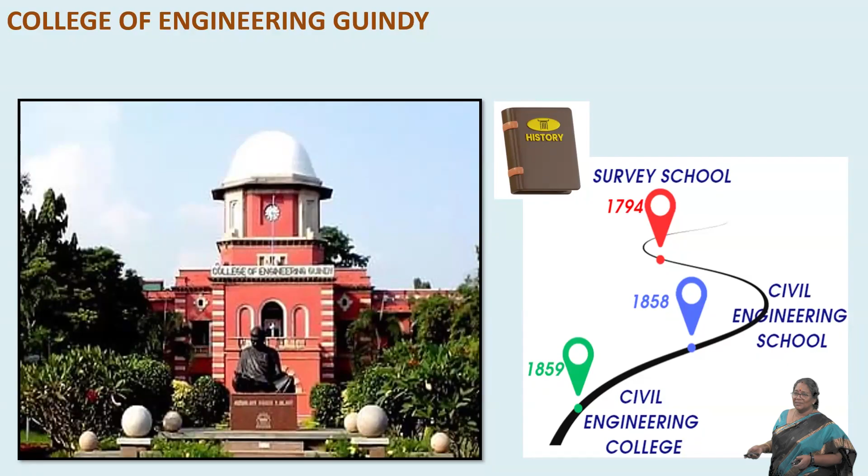Prior to 1858, it was a survey school. Then later, in 1858, they named it civil engineering school. In 1859, they named it civil engineering college, so we got the crown as a college in 1859. From 1861 onwards, mechanical and electrical started, and they named it College of Engineering, Guindy. This is the first in South India. I could say this may be the first technical school, not college, outside Europe. So that's the legacy we are holding even now.

With respect to Department of Civil Engineering, we are running 3 UG programs. It is very special that we run a PG program in a regional language, Tamil medium. And BE Geoinformatics is a very special course, focusing mainly on surveying. Nowhere else do we have BE Geoinformatics. We also run many PG programs, a total of 10, and PhD and MS by research in all disciplines. I cannot start any lecture without saying this, because I belong to Department of Civil Engineering, College of Engineering, Guindy, Anna University.

Our QS ranking was 385 last year. This year we have slipped down to 469. Sorry to us. Okay, so now I start the lecture.

It is on Precast. I think you'd have been listening to the introduction part in the previous session, which started 2 days back. Yes or no? So my class generally will be two-way traffic, never one-way traffic. I am not the radio. Kindly respond, then only the classes will be lively.

So you know what is meant by precast construction: practicing casting of components in the factory and bringing them to the site to assemble. Earlier we know this happened with respect to steel structures. Kirby is a very eminent factor, but I mean people who manufacture steel sub-assemblage and do the erection at the site. In the same portfolio, people started working in precast concrete structures also.

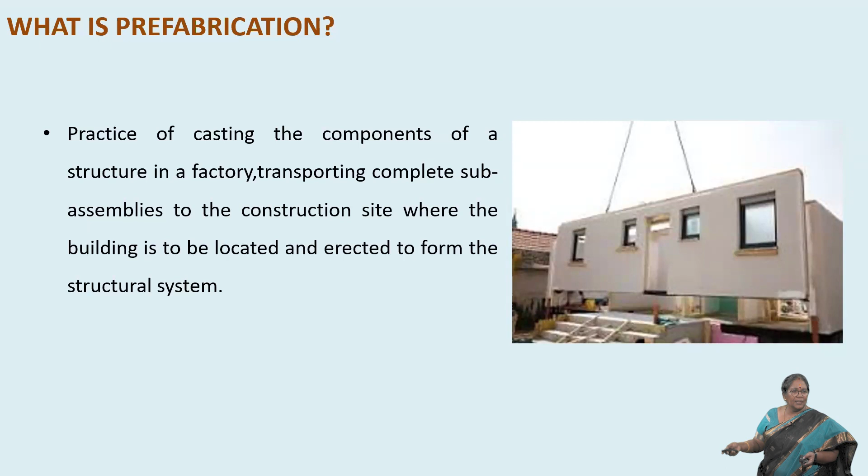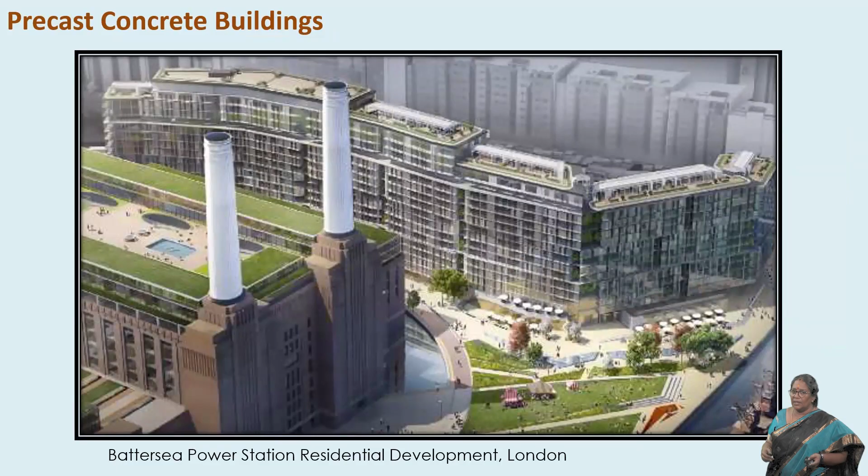Okay, so these are a few pictures. This is from London. London is not too far for precast construction. I even visited Leeds University and gave a lecture on precast construction. The hall was totally full, because they wanted to know how it is executing the precast construction. They are not known for precast construction.

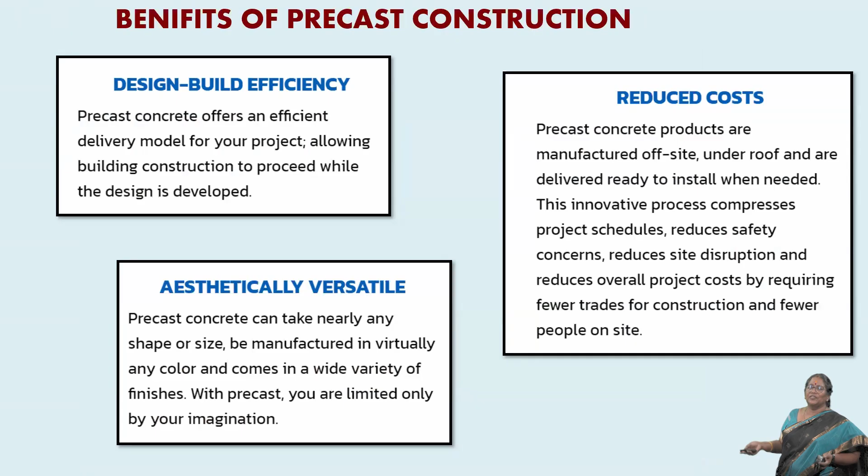There are a lot of benefits for precast construction: thermal efficient, low maintenance, sound control, Wi-Fi compatible - that is a new thing. People have a projected life for precast construction.

I don't think it is nothing new, but want one more benefit: precast is completely recyclable. We can dismantle and reinstall if it is possible. The connection has to be designed accordingly, making it an environmental friendly choice. That is the most wanted benefit people are saying.

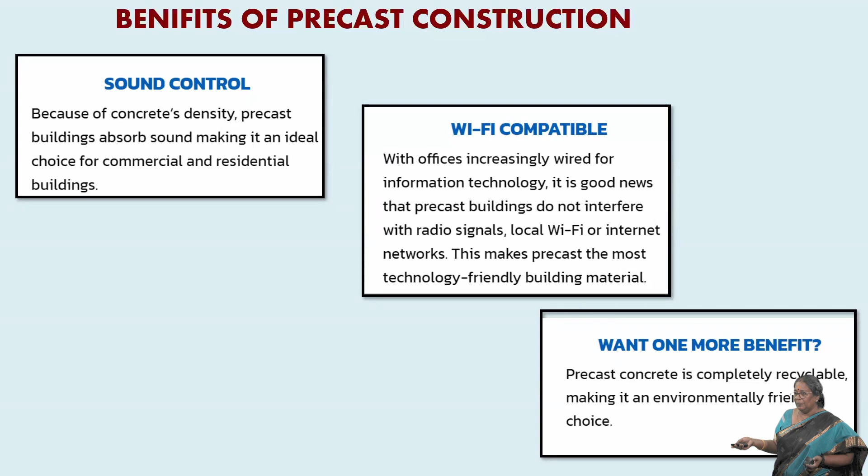Considering all these benefits, some deficiency will be there with any system, isn't it? So what is the performance of the precast structures under seismic loading? It's a very big question mark.

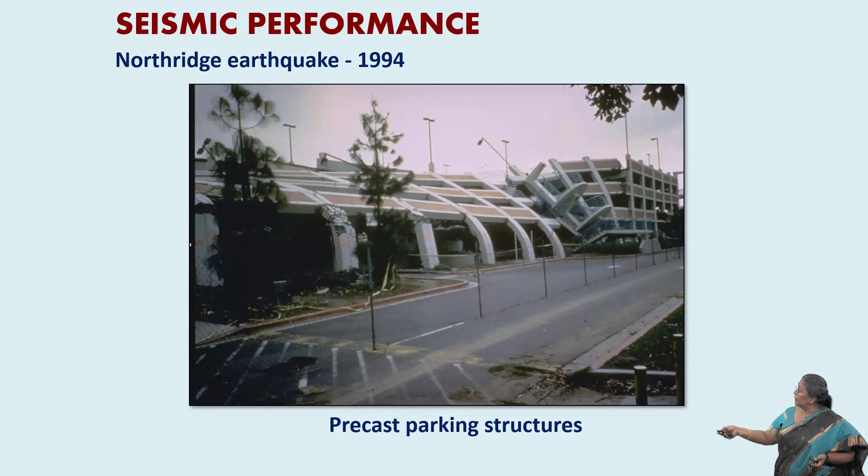This is the after-effect of the Northridge earthquake which happened in 1994. This is the failure pattern of the parking structures. Here also you can see the structure has collapsed due to the lack of connections. You can see here the lack of connections initiated the collapse of the structure.

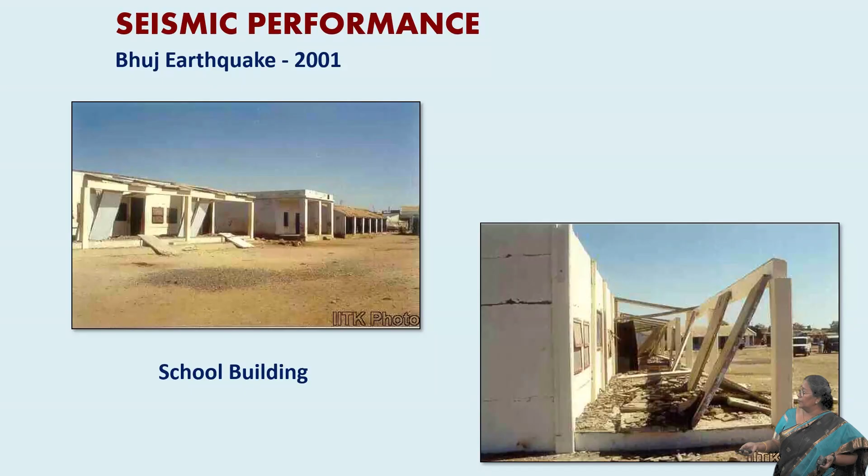This shows the importance of doing research or investigation on the connections, various types of connections. So structural elements were intact, but joints and connections failed due to inadequate detailing. This particular aspect attracts more researchers to work on the connections.

So what is the major issue? Poor connections. And you can see some leakages also in those joints. That was a major concern.

During 2016, the Structural Engineering Convention was conducted by SERC, the director Santosh Kapuria, as well as Professor Mahaprasad. Santosh Kapuria was chairman and Professor Mahaprasad and I were the co-chairpersons for conducting SEC. As part of collecting money for conducting the SEC program, we visited L&T, we met SNS.

He asked me what my research topic was, and I told him I am working on precast construction. I had come out with a lot of connection detailing and was explaining those things. Then he told me only one thing: if I can come out with a material which fills the joints and is leak proof, that would be the best option for them.

So now one of my research scholars, who is working as a faculty in College of Engineering, Trivandrum, is working on the topic of high performance concrete, micro concrete, replacing the grout of the connection joint. He is working on it, and I don't know what will be the compatibility of the normal concrete and the joint concrete.

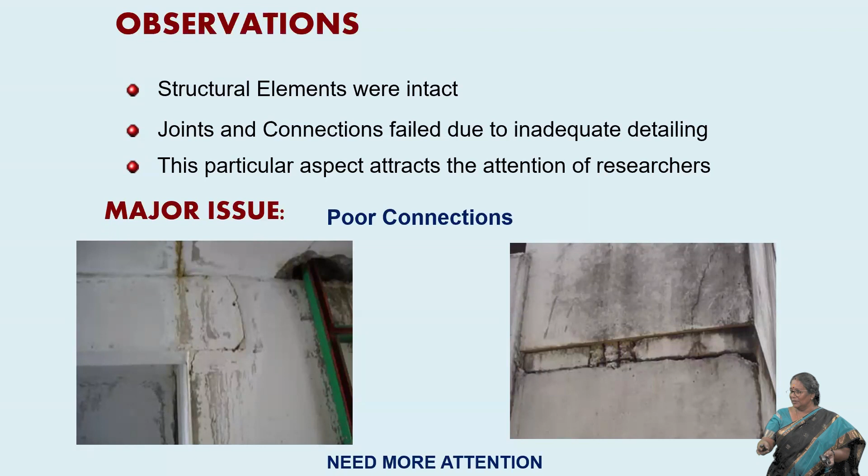Also we are working on durability aspects. I have about 2 more years before I retire from College of Engineering, so before that I could do something on that part, well and good. Around 7 people have completed their research on connections, and this person is working on that now.

Now, joints and connections are sometimes erroneously given the same nomenclature. First, kindly understand the difference between a joint and a connection. You can see here, this picture I have taken from Elliott's book.

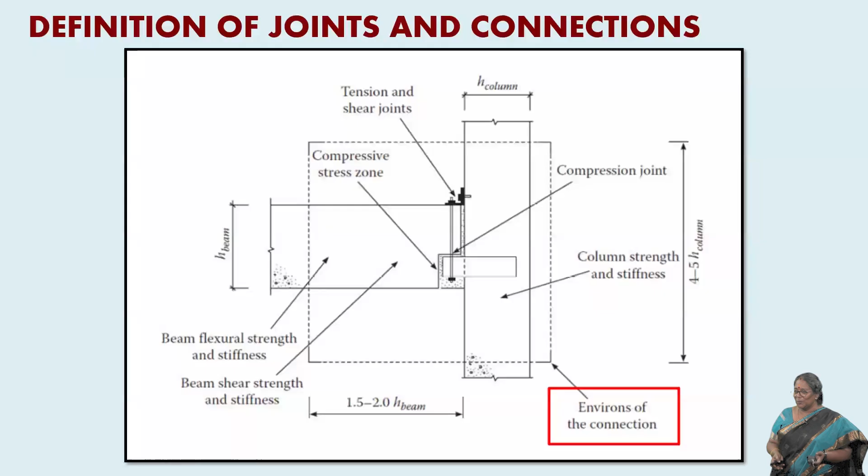Most people would have given you pictures and figures from the Elliott book. You can see here multiple joints: tension and shear joints. You can see the tension and shear joints in this part. Here it is a compression joint where this dowel member is there, and all these different types of joints - tension joint, compression joint, and multiple compression joints in a compressive stress zone.

Connecting all these different types of joints together is what is called the environs of the connection. Different types of joints will be there - tension joint, compression joint, shear joint, multiple different types. The totality of all these joints together is what is called the connection. So in a connection, different types of behaviors will be there - compression, tension, and shear.

Now you can see, especially for this column to beam connection, the connection region has been named with a dimension of 4 to 5 times h of the column, where h of the column is this one. And the width, from the face of the column, is 1.5 to 2 times h of the beam. Taking the count from this face of the column, this total region is what is called the connection region. So this is the basic fundamental difference between joint and connection.

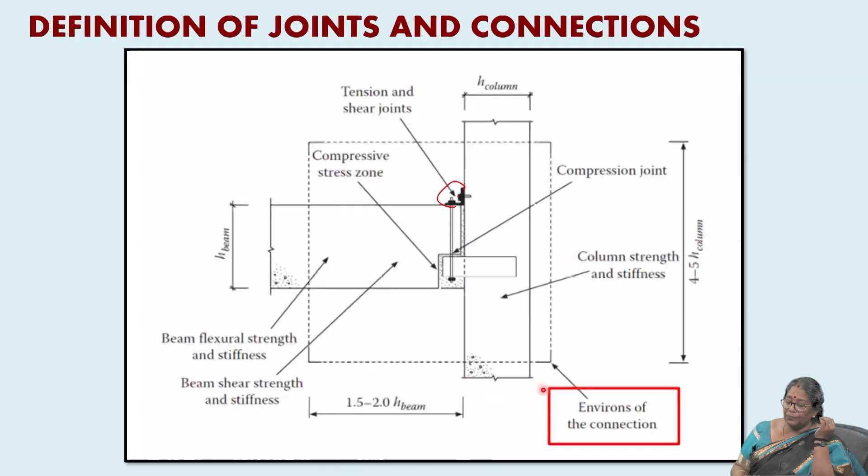Now I will explain the different types of joints. When we do the analysis, it's not a simple thing. When we talk about precast elements, we can design them in our drawings and calculations, columns also we are designing, and nowadays UG students are doing only this - they are doing the design of elements. When it comes to the joint, my humble request is that even once you become faculty members, kindly teach them how to connect the elements, and teach the joint region as well.

When students go out of campus and somebody interviews them asking about the connection and detailing at the joint, they are totally blank. When I teach RC design, I teach it fully, but I'm asking everyone to teach the complete totality of the design of RC structures. I humbly request all faculty members, and students who will become faculty, to teach the totality - otherwise it's a waste of time for them as well as for us.

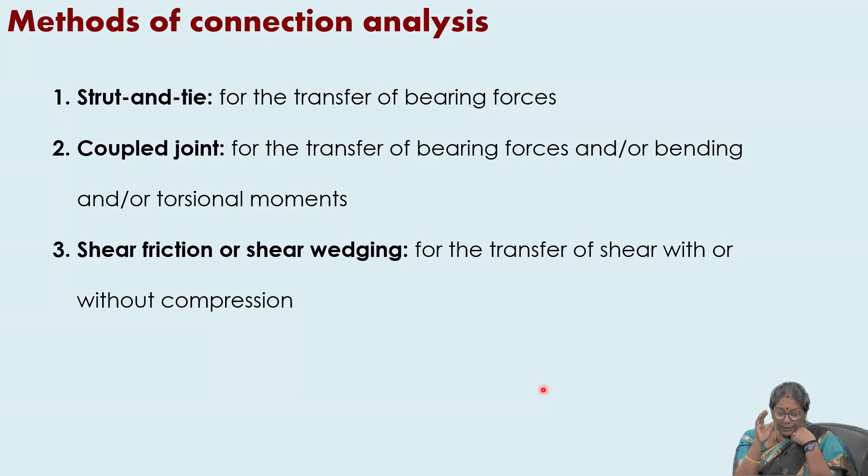So when we do the analysis of the joint or connections, we can utilize different methodologies: the strut and tie method, couple joint method, and shear friction or shear wedging method. I'm not going in depth with this because it's a very lengthy process, but these are the various methods we can utilize for the analysis.

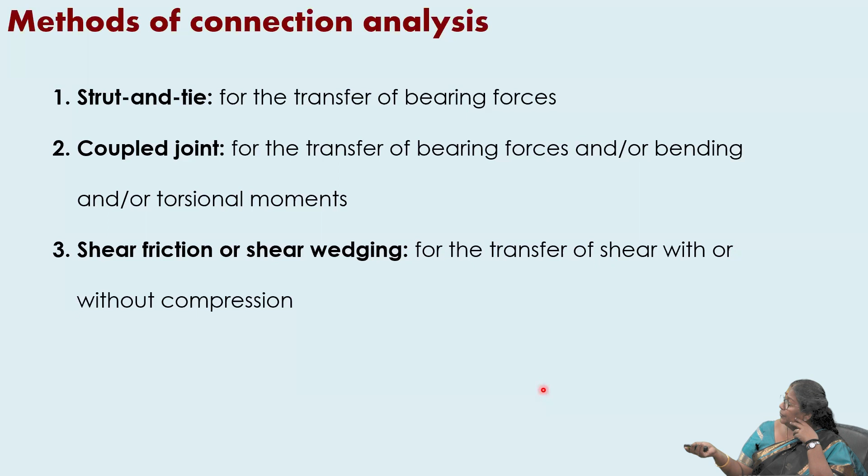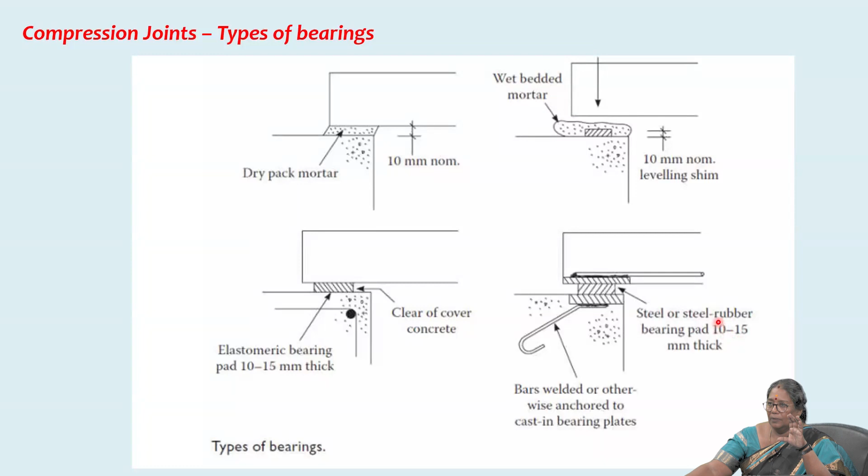And here also you can see, this is the compression pad, wet bedded mortar, which has been used on top of the bearing pad. This is a steel or steel rubber bearing pad, 10 to 15 mm thick. All these are different types of compression pads, bearing pads, which bear the compression stresses in that joint region. These are the various types of compression bearing pads and compression joints.

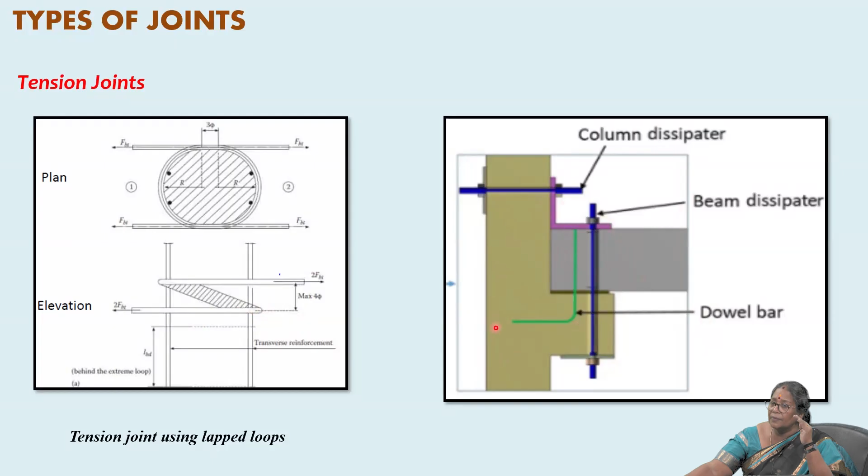And here also you can witness these dowel bars, when this beam is getting loaded and this particular area is getting stressed with the joint shear and all, these dowel bars will undergo tensile pressure. So we are supposed to design even each and every minute aspect of the joint region also.

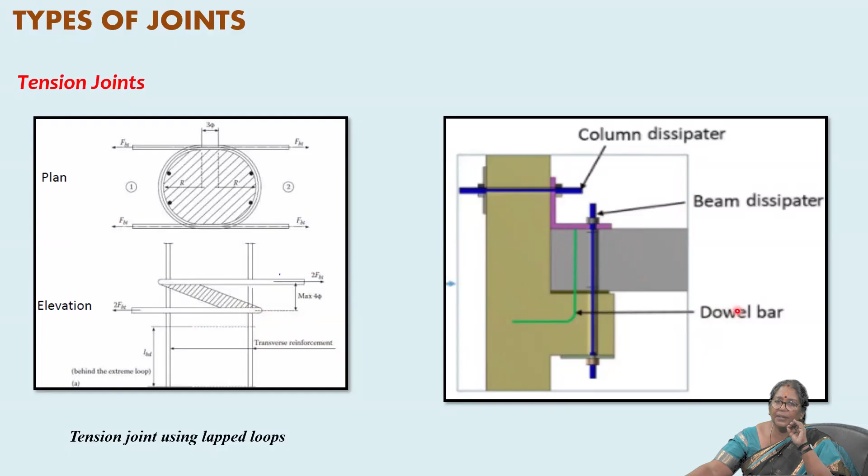So now comes the shear joints. I have taken some more examples. The shear joints, whenever you look at the dowels, it will be undergoing the shear action also. Double shear, you would have studied in soil mechanics, double shear test, isn't it? Similarly, all these dowels, when connecting through one particular element and passing through the other one, will undergo shear stresses also. So this comes under shear joints.

Now comes the major part. We generally go with, most RC precast elements are designed with the moment resistant joint. Now just look at this beam column joint, that also is moment resistant. We are not releasing it. Some elements, some structures we can design as a pin jointed connection. I'll show you, after my presentation, the difference between the pin and moment resistance connection. This is the moment resistant connection.

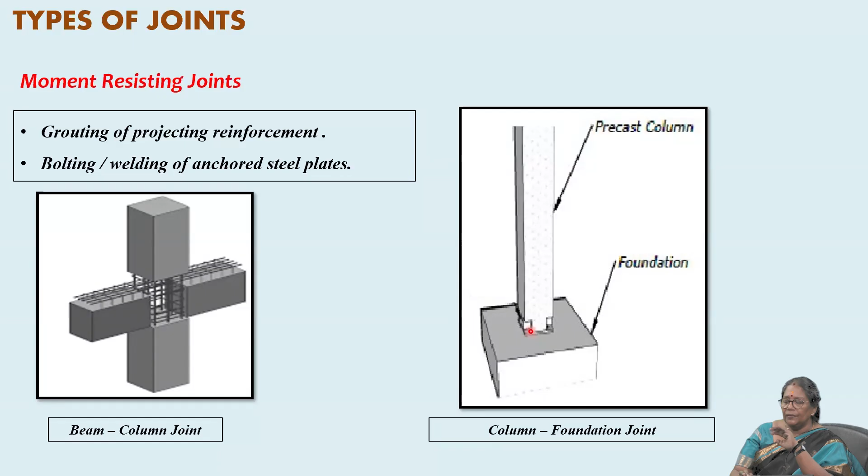We are allowing the joint to take moments, not only here in the beam column joint, but also for the foundation, the column foundation joint, which we can also design as a moment resistant frame. We have to design these elements and the joints accordingly. That's the important thing.

Now I'm going to discuss, till now I was telling about the joints, now comes the connections. So the connections, basically 4 rules we have to satisfy with respect to joint and connection. Satisfactory joint design, which is further taken to the connection region, and the component can resist ultimate design loads in a ductile manner. We have to make sure all structural elements connecting in that joint, as well as in totality as connections, each and every element has to be designed as a ductile element. The precast members can be manufactured economically and be erected safely and speedily.

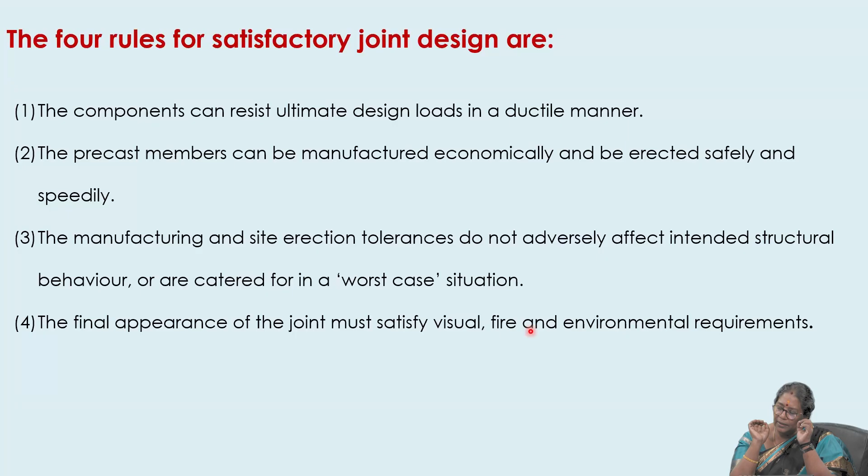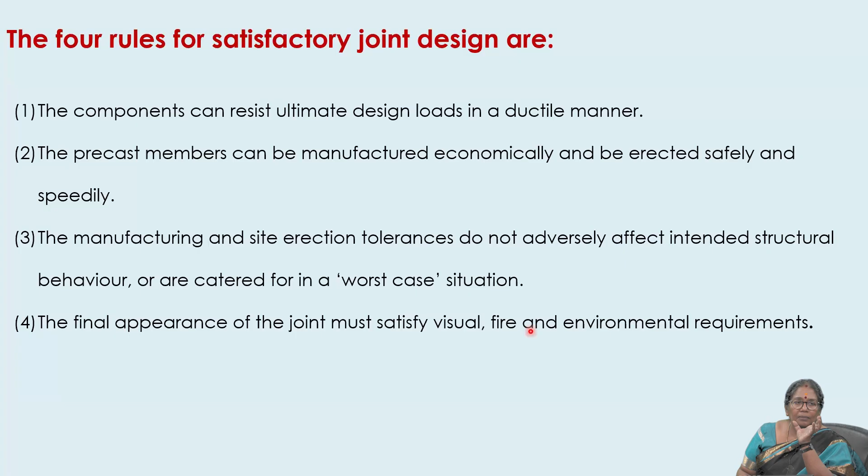These are very, very important. The last one is extremely important, but why? Because whenever we are thinking about the safe joint, architecturally we cannot make it pleasing. There also, there should be a balance between structural safety, strength, and visual appearance. All these things should be matched together whenever we are designing any structural system.

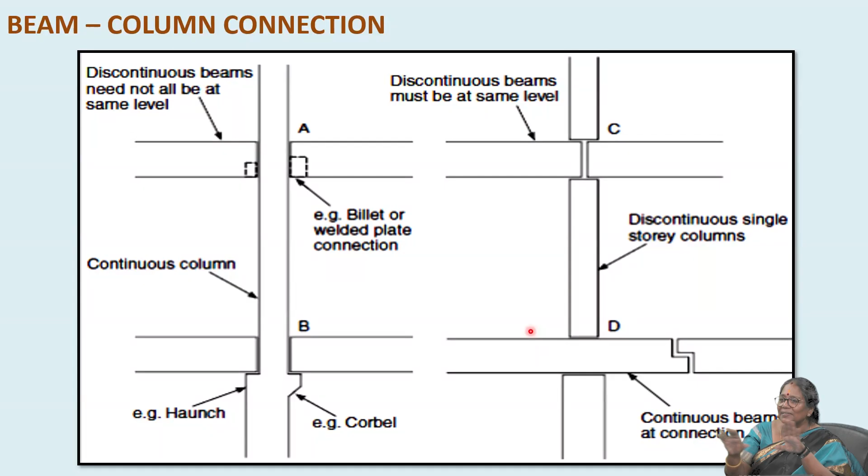Otherwise, any junction, like a traffic junction, is also dangerous, isn't it? Here also C is a dangerous thing. But most construction in practice follows C. That is the unfortunate thing. We are following condition C, where both are discontinuous, which only gives flexibility at the site.

It is not a dry connection. Generally it is an emulative connection, a hybrid connection. There will be mechanical elements as well as dry plus wet elements - that I can call an emulative connection. Generally, people are following connection C.

Because of that, we have to give more importance while designing the connections. Continuous reinforcement will be provided as a dowel bar - from one column to another column as well as one beam to the other beam. Proper connection has to be there. That is the challenge: how we will provide proper connectivity between the beams as well as the columns.

It's essentially a junction. When you think about a traffic junction, the challenge the traffic police face, we have to take that same challenge and do the design appropriately, without harming the best feature of the joint - the elements being factory made, perfect elements - and how good we can make the joints matters a lot.

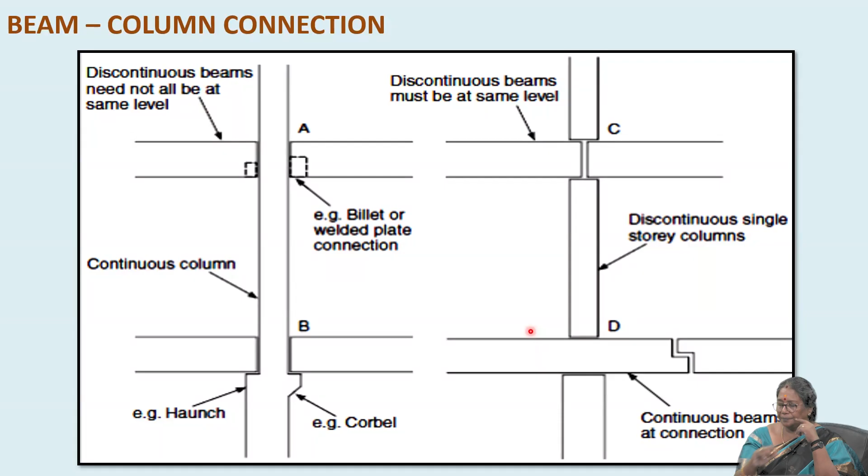Now you see here, in this case, columns are continuous at that particular joint. It is not always so. We can even cast these beams continuously at the site or factory and bring one or two bays, and if that is the case, the columns as well as the beam can be connected like this.

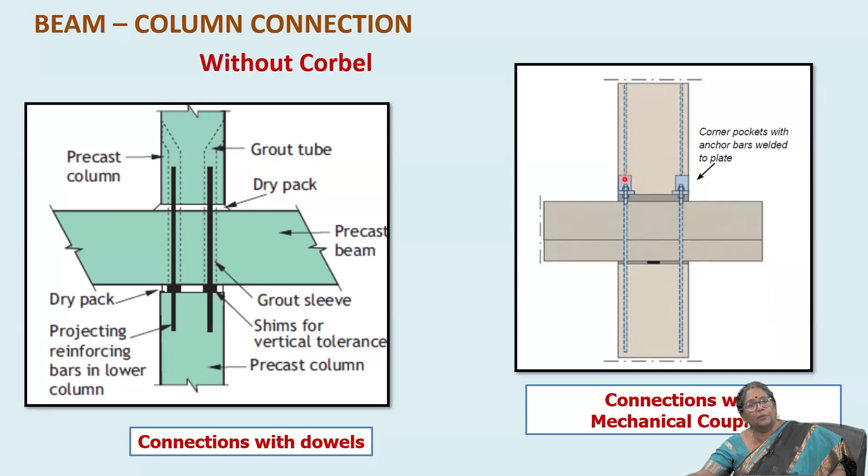It's actually like not a budging plate. One plate here, the other plate here. This plate will get connected to that plate, and there is a pocket available. Above that pocket, there will be a base plate. To this base plate, the top bar will be welded.

Understood? I don't have the picture. So it is simple. This is the top bar, no?

Base of the bar, there will be a plate. Along with the plate, the concreting will have been done. Okay, it is a factory made thing, no? There was a plate outside, and the bar will be protruding, and the concrete would have been above this particular plate.

So when we look into this particular joint, there will be a plate at the top, bottom plate, here the protruded nut and bolt, and this portion will be filled with the grout.

I'm talking about all the connections related to the construction of buildings, only buildings. I'm not going beyond that. Infrastructure like bridges and all, I didn't consider. Only buildings - all connections are with respect to buildings.

Yes, each and every bar has to be connected like this. There you can provide a total, but considering the distance between the two bars, they can be connected to a single plate.

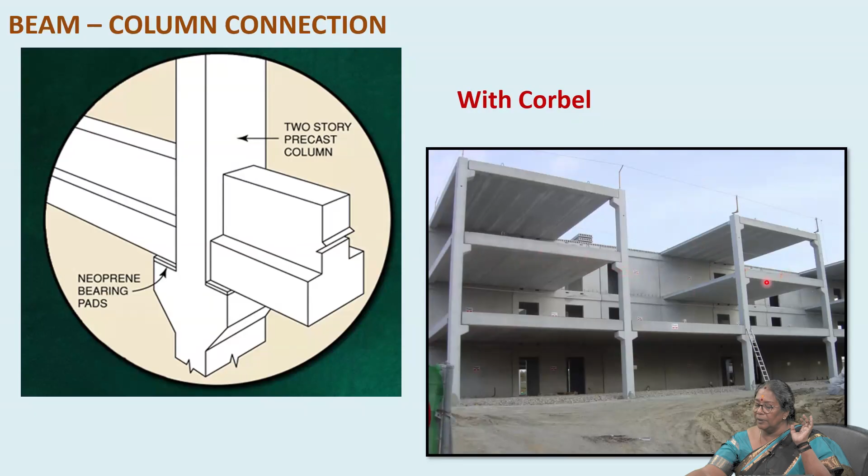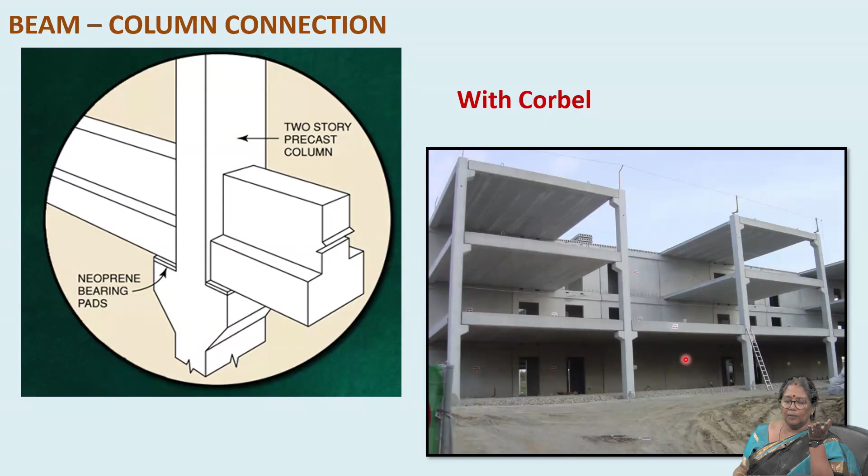This comes with the corbel, beam column connections with the corbel. You can see here, this is the column, and beams are coming and resting to the column from either side. The corbels are on either side. Here the beam is coming and resting, and this particular portion is open to sky - that's why it is only one side corbel here, and another side corbel here at the top region. This is the actual picture from the site with the corbel connections, and this is the beam column connection, dry connections.

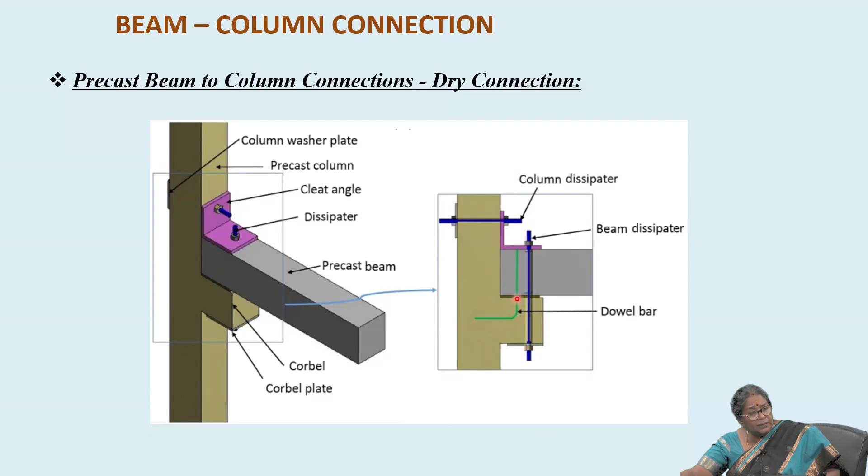It will be grouted, and after that only the plate will be provided, because the majority of the connections are dry connections. Only one particular dowel bar needs grouting, isn't it? That dowel bar is initially protruded, it will already be inserted within this column and nib region, and it will be protruded beyond this nib, and only this portion will be seen outside. All the other connections, 99% of them, are dry connections.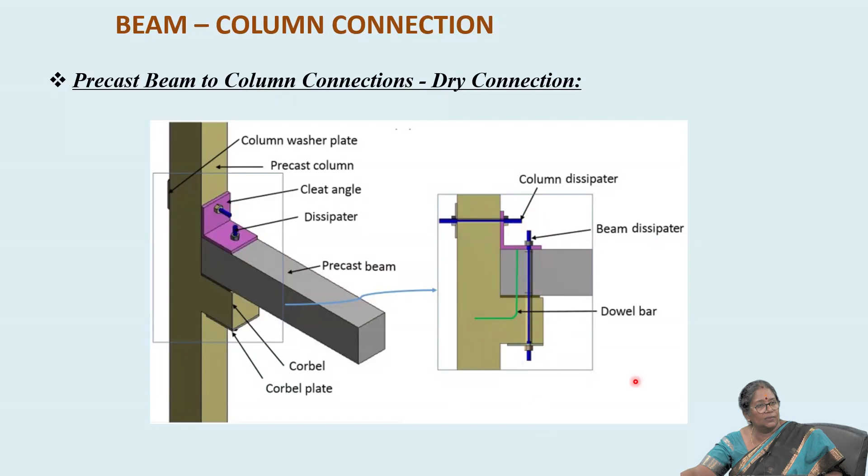Anything else? Okay, this is a typical hybrid connection, emulative connection. We are almost following what the precast construction industry is following. Now you can see here, this is the bottom column with two corbels on either side, and that provides spacing for the beam to sit.

You can see here, this is the compression joint on both sides, and these are the protruded stirrups, the stirrup portion coming outside. This beam will be placed in position, and from this bottom column these dowel bars are protruded outward. So finally, we make the beam sit on this corbel, and this particular portion which is protruded outward, these hatched portions are in situ, and this longitudinal bar will be inserted through the protruded stirrups.

You can see here, these are the protruded stirrups. The longitudinal bar will be inserted through the stirrups and tied with binding wires. Then this portion will be filled with in situ concrete with sufficient formwork on either side. The protruded bar coming out of this column will be protruded outward here also, and the top column will be inserted, and this sleeve will be grouted. Generally we provide pressure grouting.

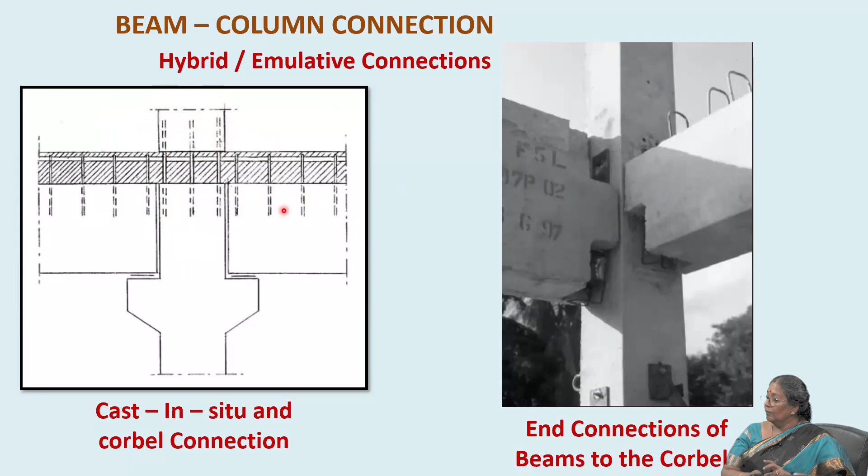This is the type of connection followed by Shirke. Shirke has patented this connection, and there was a very strong discussion between the Shirke technical people and me. The problem is that it is a patented connection, it cannot be included, they cannot give it to include in the code. Nobody will be ready to give a patented connection they developed to become a public document, so they are not ready to give this connection detailing to us. We are unable to provide this.

So actually this will be protruded outward from this point and this point towards like this. And at the site, when they are about to erect, they will bend it upward and it will be connected through another rod here. You can see here.

To answer somebody's question about how the dowel bars interior, the additional dowel bars are connected, I can say stirrups are providing at this connection region. Here the dowel bar is coming up, isn't it? This stirrup is connecting this dowel bar and this dowel bar. And in the interior portion, these additional bars you could see inside here to here. These are the additional bars, the connection between the bottom column and the upper column.

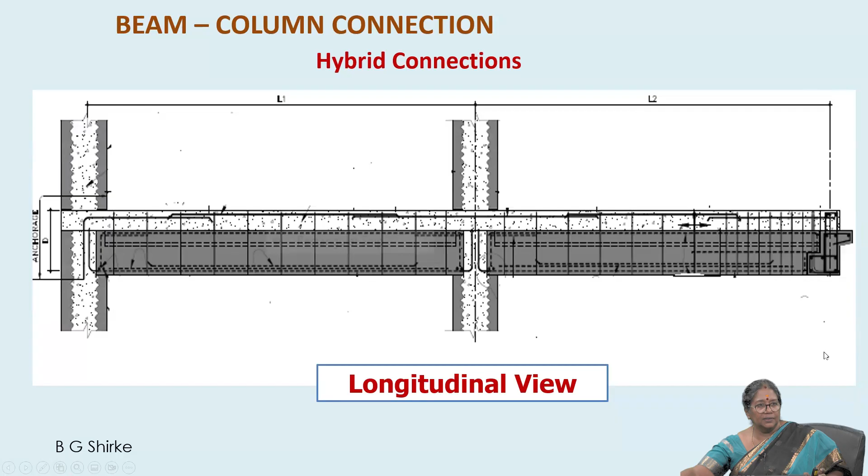The bottom bar is bended upward. So this is the longitudinal view of a beam column connection. So two connections here, isn't it? This is the end connection and this is the intermediate connection. So this is the actual view.

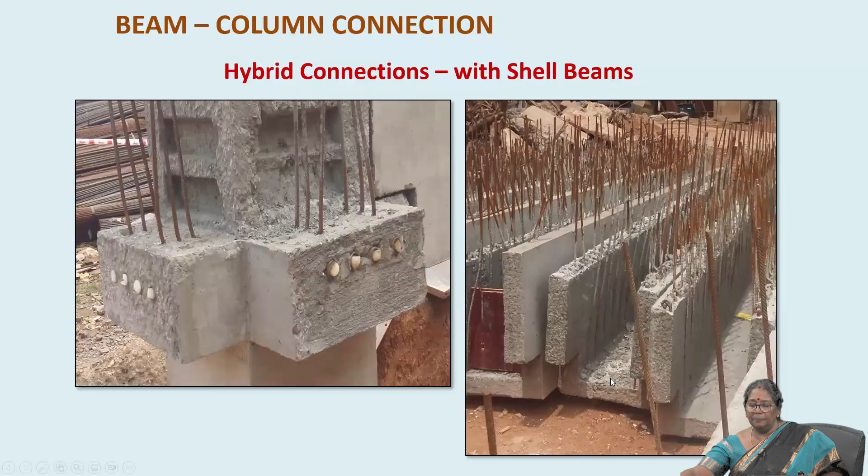And it will come and sit over here. Then the interior portion will be filled with the in situ concrete. The final picture will be like this. The upward portion, whatever is here, it will be bent to and fro, forming like a formwork. Then they will insert the longitudinal bar and fill this portion also. That's what is happening.

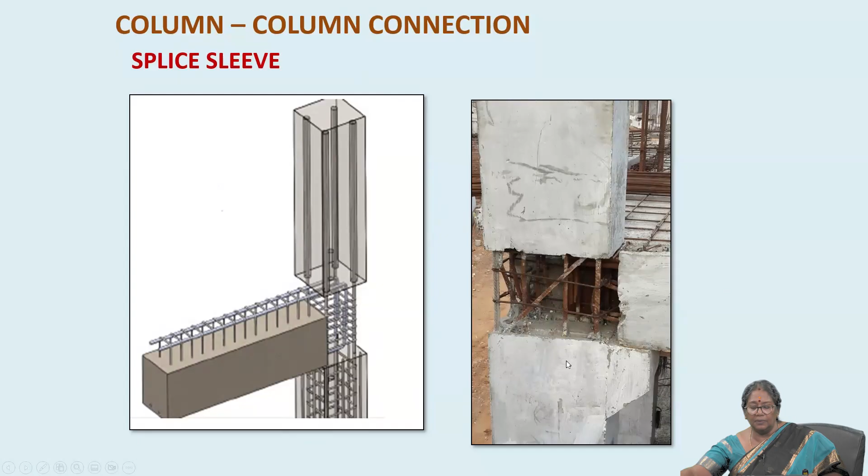So this is the beam column connection splice sleeve. You can see here, this is the beam and two columns, and the beam is getting inserted here. This joint will be filled up with the in situ concrete. And this is the column to column connections.

Initially we had a discussion, isn't it, about how we will be getting connected. So you can see here, this is the bottom bar coming up here. There's a plate, fully it is getting welded with this one. And the top bars, you can see the protruded dowel bars here, isn't it, it will be getting connected on the plate. This is the shims in between, that is the compression joint.

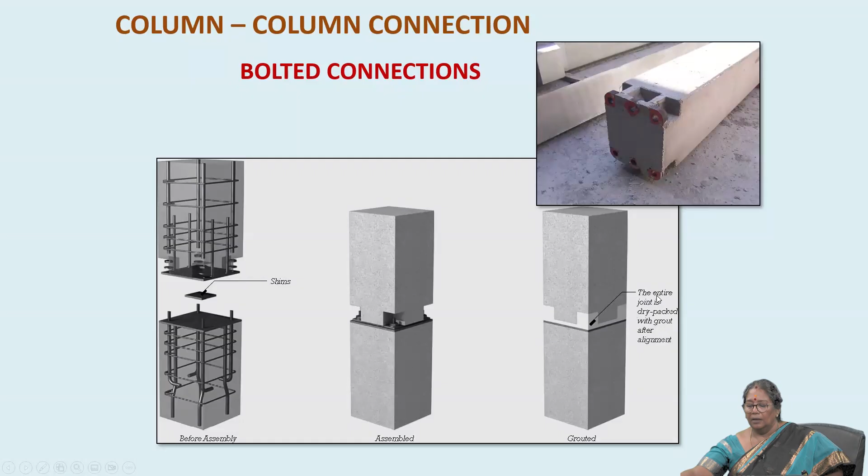This will adjust for leveling purposes. And finally what will happen, this protruded bar will be fixed with a bottom bolt, and finally it will be filled, the entire joint is dry packed with the grout after. Here you can see this is the actual picture from the site. The bottom of this column, it will be like this. The pocket will be provided like this. It has been arranged. So this is the column to column connection.

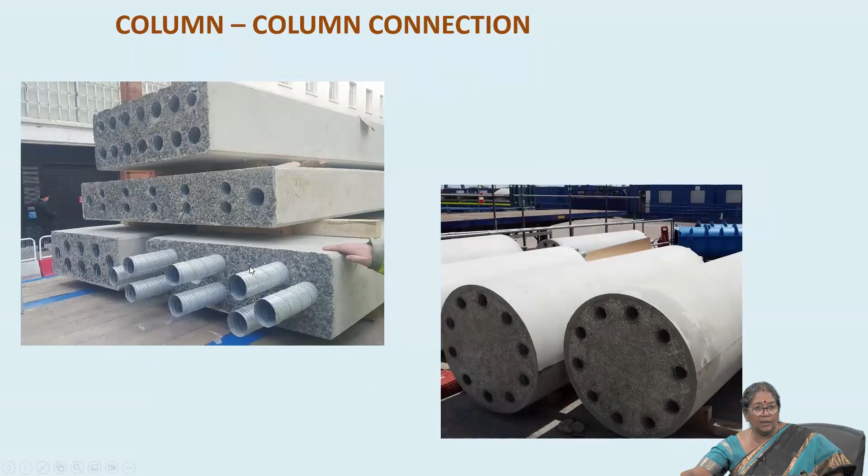See, this is the sleeve. So now the bars will be protruded and it will go inside these sleeves and it will be grouted later. And this is also a video. I don't know if the video is working. Not working. Yes, working. Sound is not there.

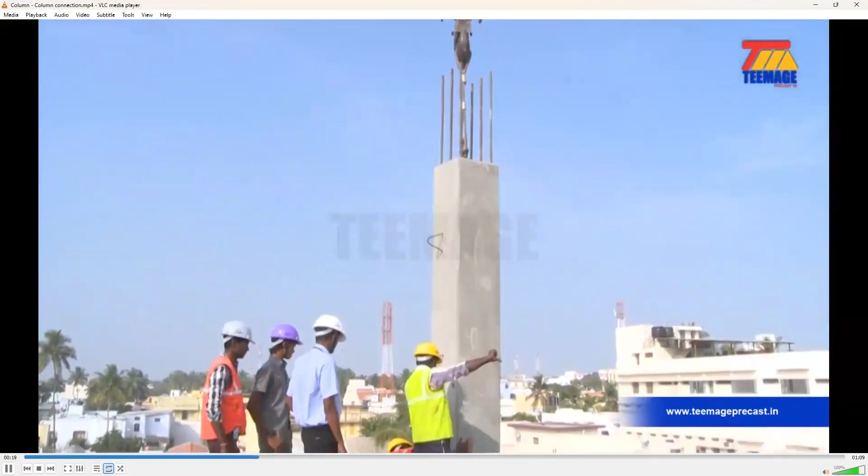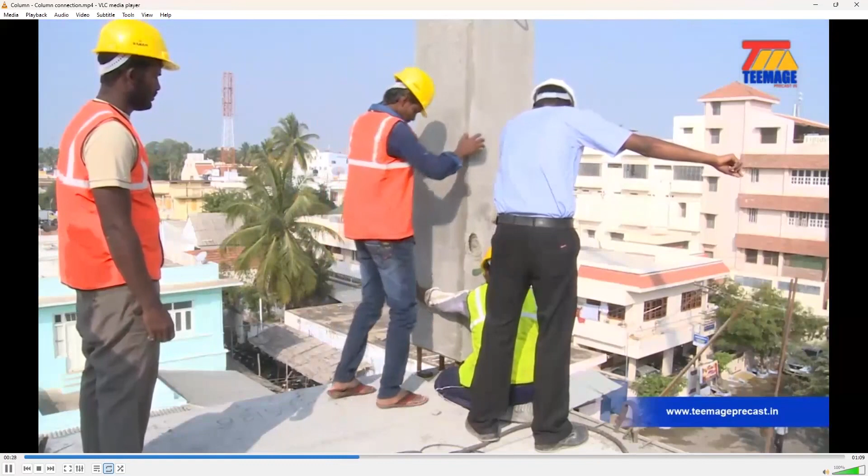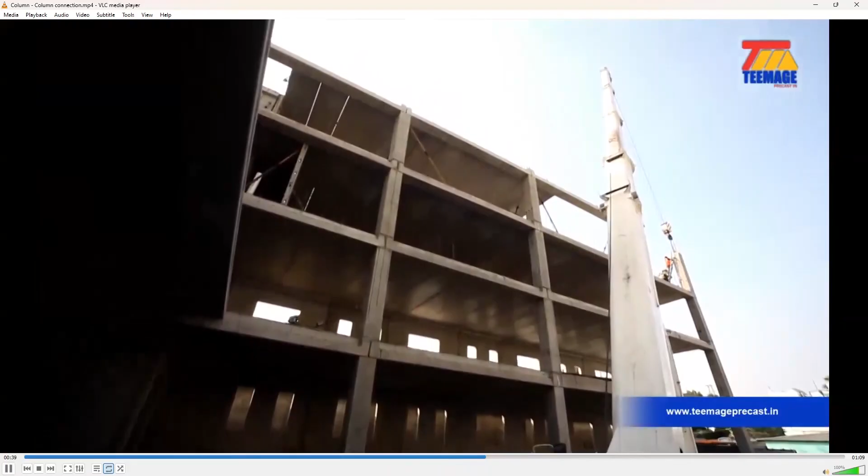No, it's okay, fine. So this is the construction at site by the Teemage group. Anyone with free time can go and see Velachery Chennai Silks building. From that site only I have taken this picture and it is erected. You can see here the protruded bars. No, building only is available now, the construction is long back. Chennai Silks, Velachery. So this is the erection of the beam on top of that.

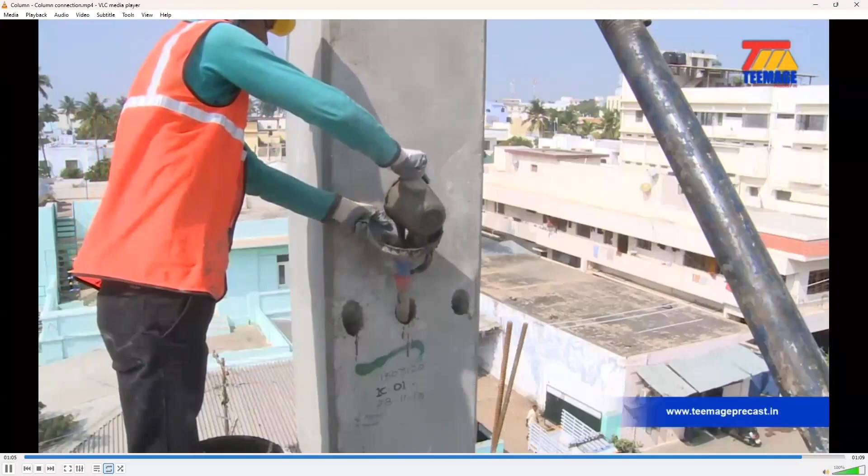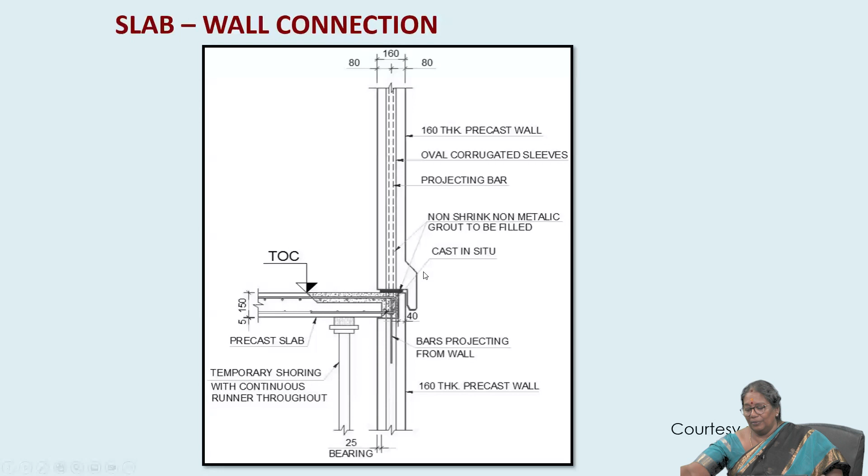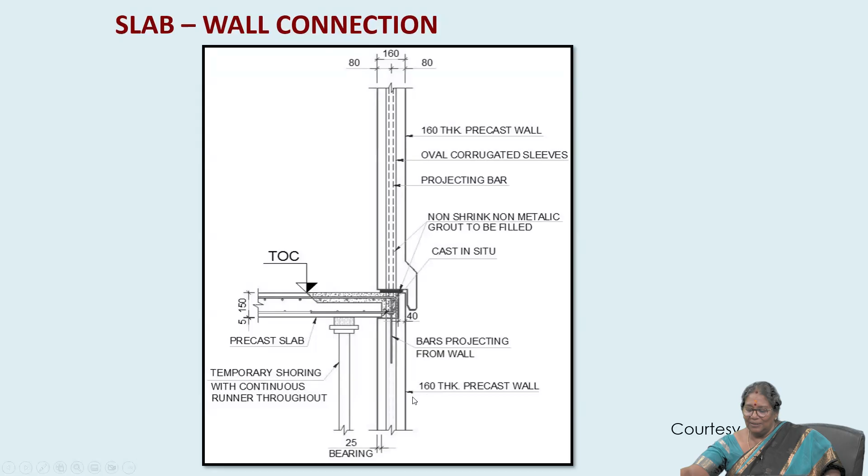And when you look from this side elevation, it is a projection outward, isn't it? The architect would have done appropriate maintenance on that part. But later there was a discussion on that, and they changed it like this. You could see here, so not the thumb down, a small finger down.

So that way that has been changed. Ultimately they can flesh it out later when they are doing the exterior part. So this is the slab to wall connections.

These are the two walls and the slab is in between. So you can see slab to wall connections. If it is an interior wall also, you can see this is a top wall and this is the bottom wall. Somebody was asking about the joint forces, isn't it?

We have to design for all these forces. We have to do the analysis and the design for that. We have to design for this overturning moment as well as whatever shear is coming from the columns and axial load from the walls also.

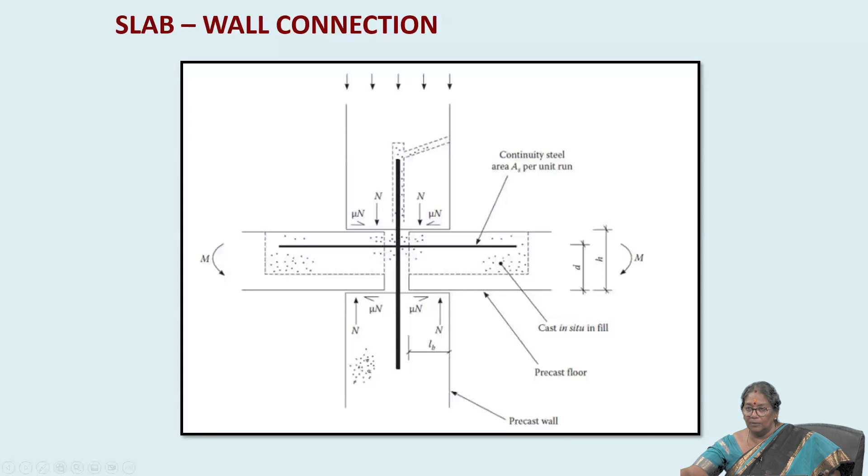This is the wall, slab to wall connection. I'll go a little faster, I think I was teaching till now at a very slow pace. So this is the slab to beam connection.

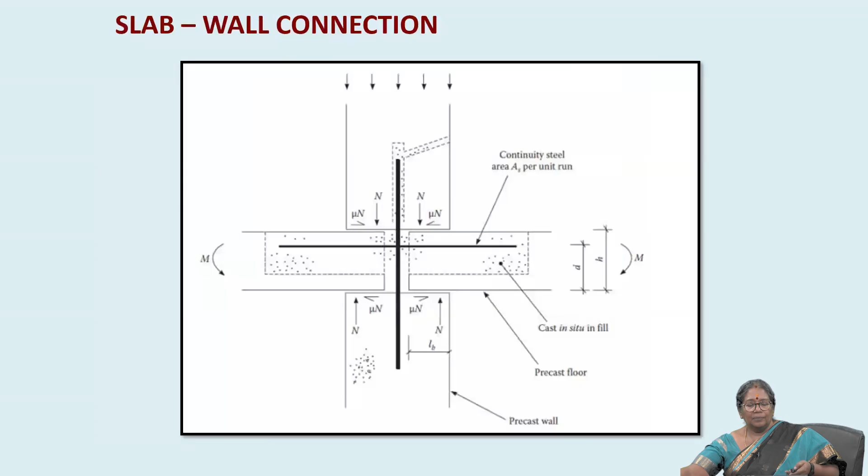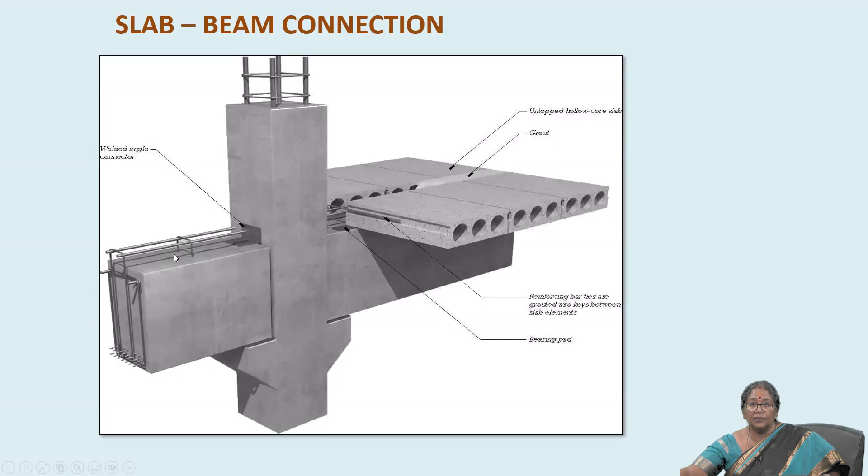You can see my mouse. So this is the protruded stirrups and this is the longitudinal bar. The same thing extends here, as well as double cross bars between these slabs, and everything will be connected at this joint region and filled with the grouts.

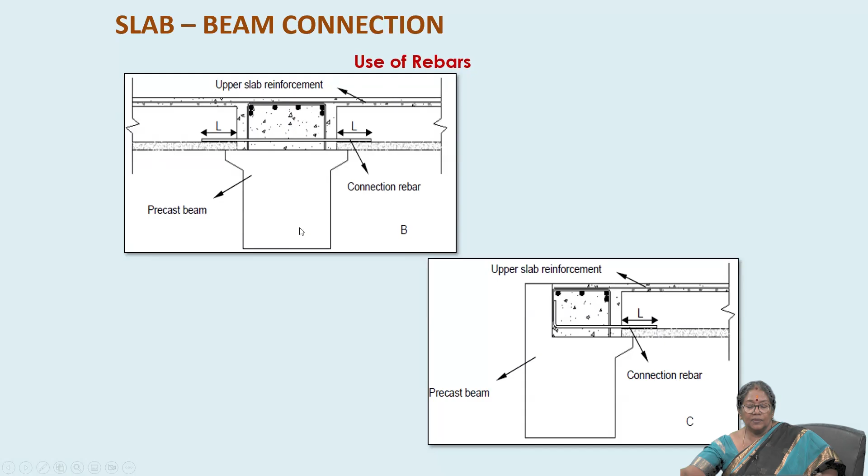This is the slab beam connection again. You can see this is the precast beam running. On top of the beam, additionally the slab is coming and getting connected, in exactly the similar way. This is the interior connection, and this is the corner connection or exterior connections.

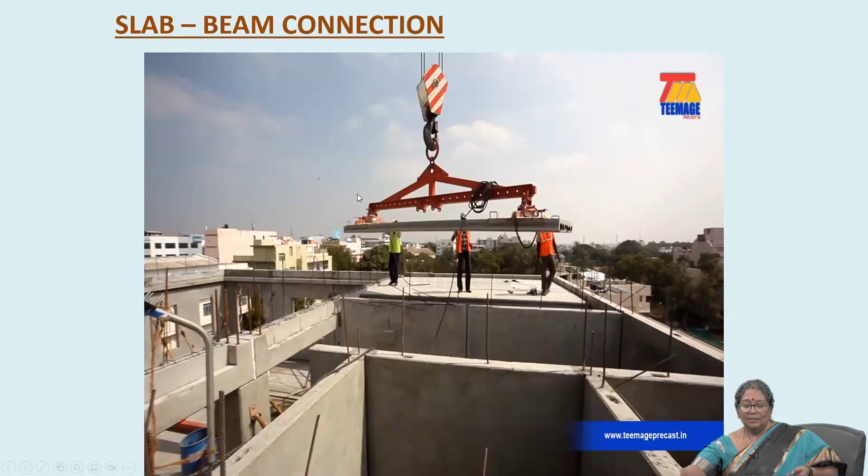So I'm not running this. Can I run? If something gets stuck, I don't know. It's not working, it's not working. Anyway, I'll show you later.

These are the precast walls, and this is the precast wall to slab connection. You can see here, these are the stitching required. These are the walls with the holes intermediately.

Okay, these are the protruded bars from there. Here also, and this is how it is getting connected, the precast wall to the slab. The casting of the thin walls at the side, just I have shown a picture for that.

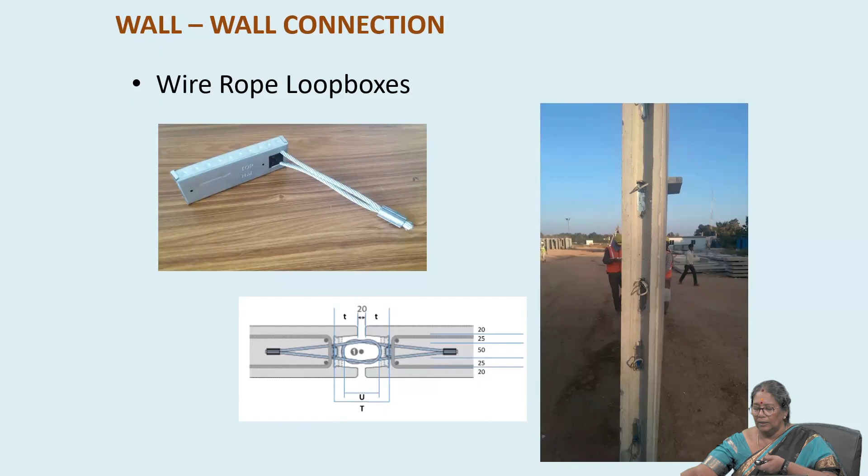Wire rope loopbox connections - I think one of your students has done the wire rope loopbox connection also, the vertical connections. These are the different types of connection. You can see here there is a wire loop, and it will be getting attached with the interior of the inner columns, and this will be protruded outward. That will be getting connected through the longitudinal bars.

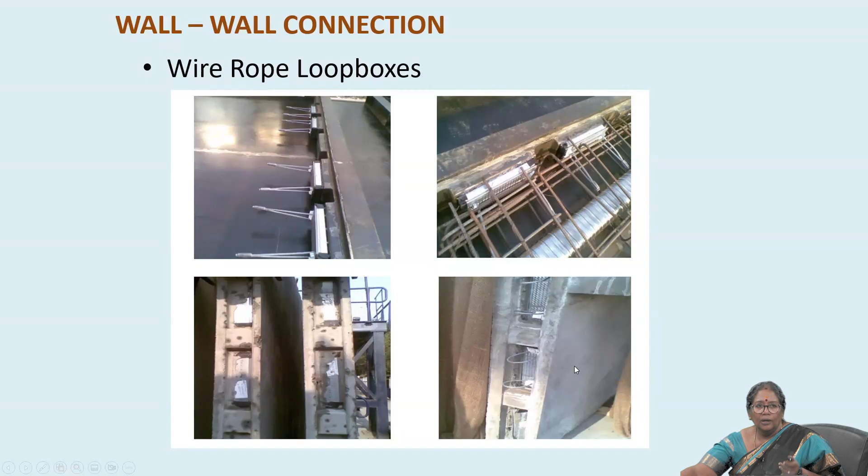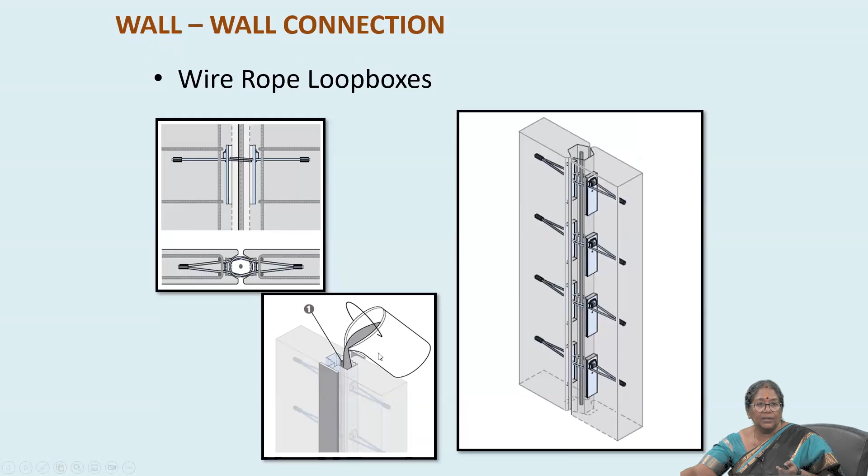This is how it will look, and the interior portion will be filled with grout by providing formwork on either side. This is the wall to wall connection, vertical connections. And these are the different types of connection.

You could see here, it's a spider web connection type of thing for connecting between the walls. This picture I have taken from what the Chennai Silks building team has constructed, and these are the vertical joints, multiple vertical joints between the wall to wall connection.

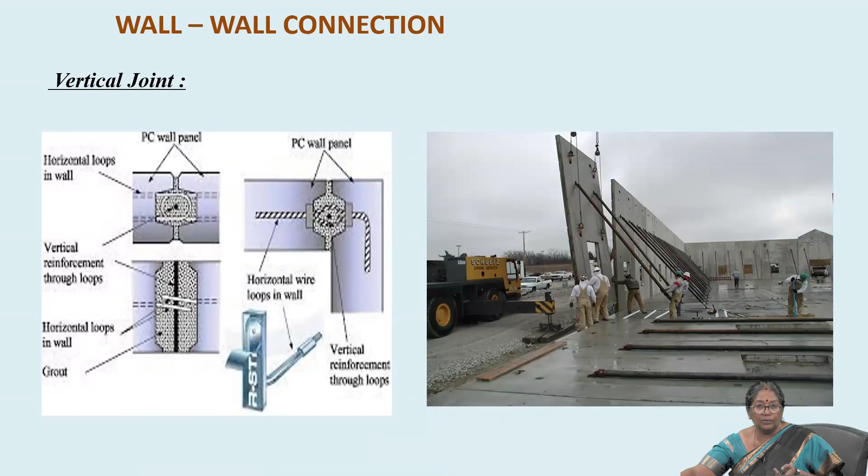During the erection process, it has to be supported like this, then only the stability will be achieved for any type of vertical connection, or whatever the connection may be. These are the horizontal connections.

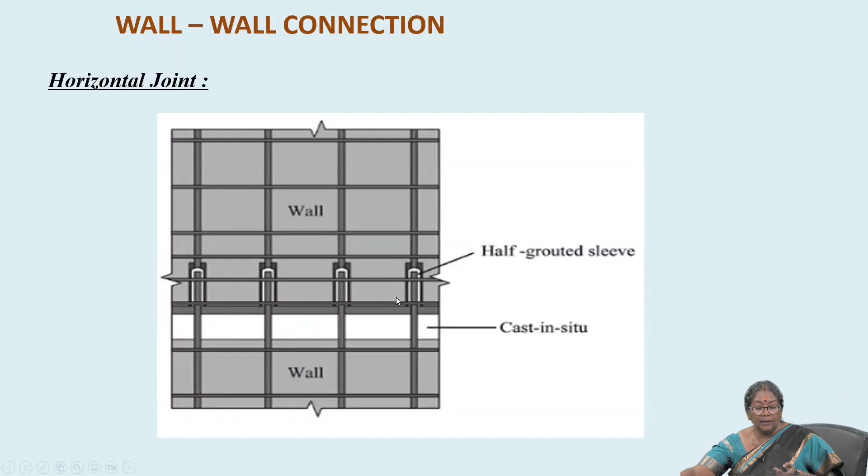One of my students has done this wall to wall connection. This is the cast in situ grouting we generally do, and a half grouted sleeve on this part, and he has used couplers for the connection. I told you initially what is the difference - I'll show you what is the difference between the pinned connection and the rigid connection.

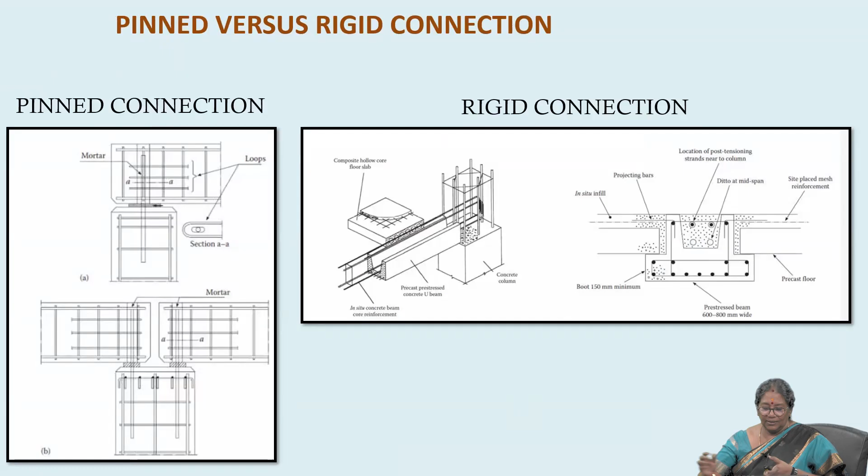You can see here, this pinned connection - this is the link dowel coming out of this, and only a compression joint here, and it is not a moment resistant connection. It is just resting on top of that.

Same thing is over here. This is a bigger column. On either side, beams are coming and resting on that. It is just a pinned connection, and it is not connected. These beams are also not connected together.

What is the advantage here? We need not design this joint, the connection point, for the moment. It allows rotation - it's only a pinned connection. It allows rotation this way and this way, as well as here also.

It's a very simple connection. When you do the analysis also, the beam has to be designed for a simply supported moment only. We need reinforcement at the bottom of the interior portion. So like that we can design.

If it is a pinned connection, we need to be much careful when choosing this pin connection. That cannot be chosen for multi-story buildings. Maybe for one story - what I can say, warehouses or industrial sheds or some sort of thing - we can go with the pinned connection. Otherwise, we have to go with the rigid connection.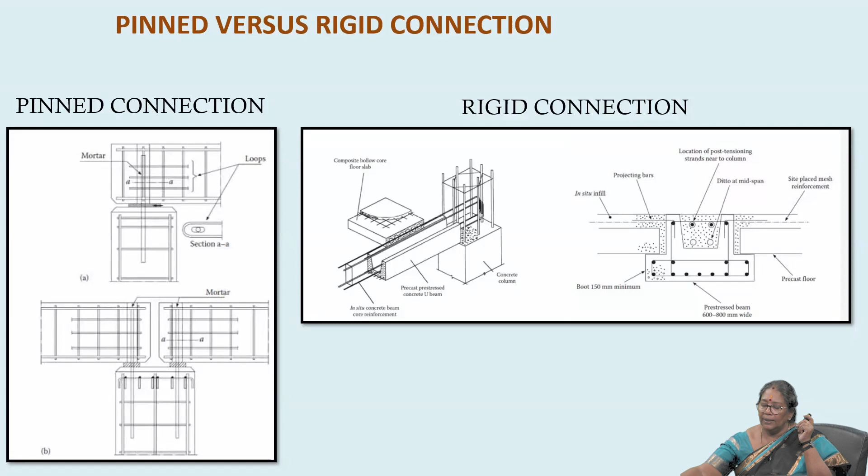This is exactly a typical rigid connection. Beam is running here as well as slab also. This is a beam to column connection. All these connections are rigid connections.

Mostly we have to look into what features we have incorporated to arrest the rotation. There it comes the moment resistance. Right? Yes, please.

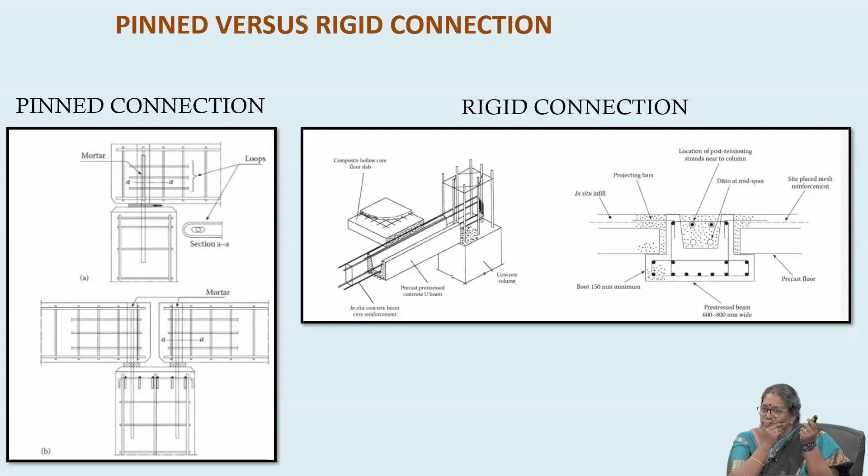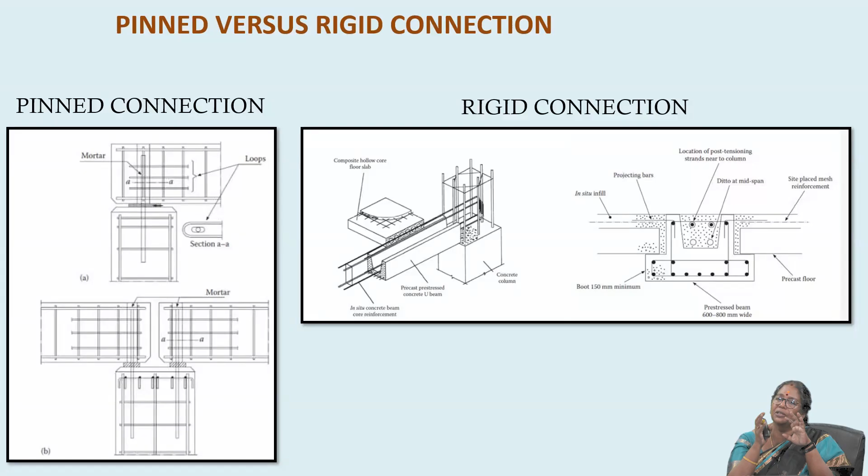If you want a pinned connection, only one bar is getting connected, not multiple. That will allow rotation. And sometimes the dowel bars undergo ductile deformation also if overloaded.

Give some rigidity - we have to judiciously choose what should be the dowel dimension also. It is possible for only one story buildings, not more than that.

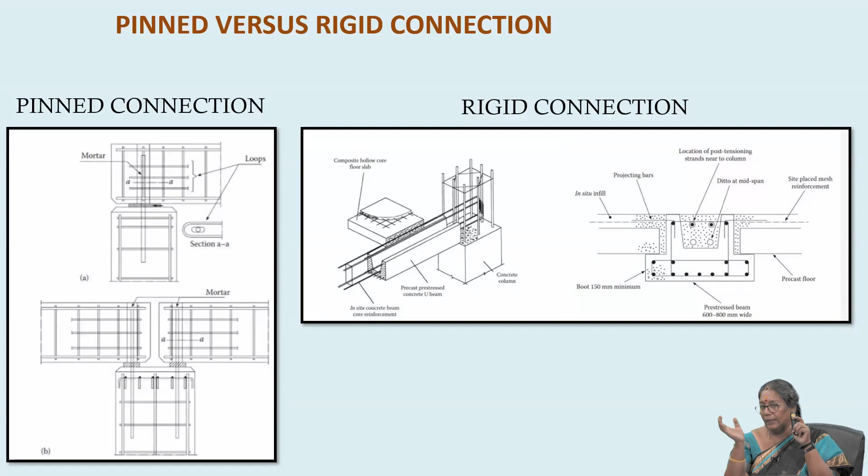I'll not take much time, I'll just browse through what is happening in research at Anna University. One of my first students, Dr. Vidjeapriya, after the Bhuj earthquake, I saw multiple photos of connection failures.

I suggested my scholar do research on precast connections. She did mechanical connections and published a paper in an ASCE journal on constructed performance.

This is for the students doing research. When I gave her this topic, she told me, ma'am, I am not getting any literature, no published papers are available, it is quite difficult to continue with the research. She asked me to change the topic.

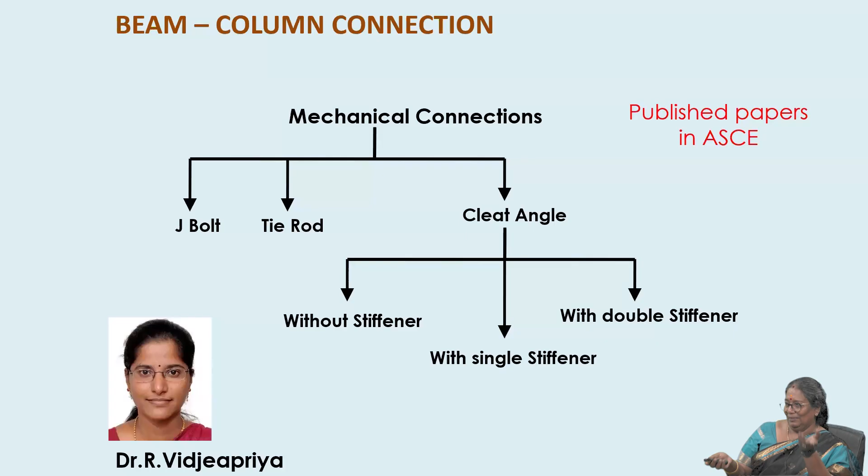I told her, if you are not getting any published papers, well and good. Once you publish, your paper will get a lot of citations. Now her paper has around 6,000 citations. That is the beauty of it. She has done a very good job and is still working on this topic.

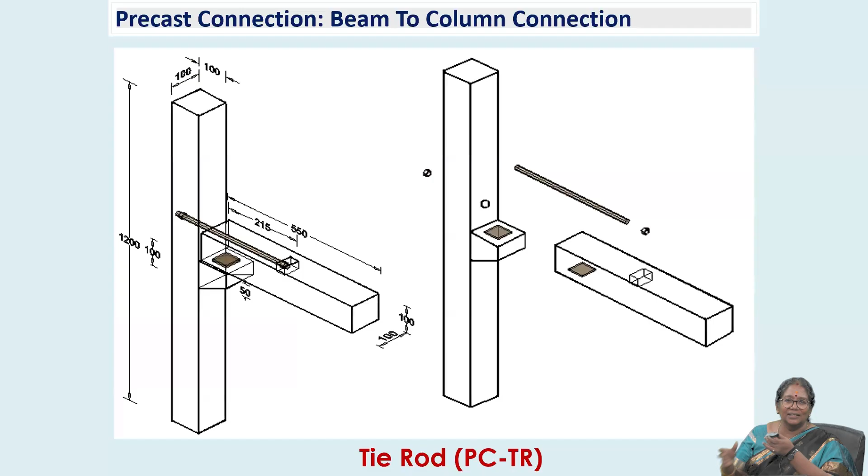That day we were discussing, I was telling Pillai that we had to start courses on precast construction. We started that in 2004. When I gave this topic to Dr. Vidjeapriya, I told her the best way to learn is to teach, so she should offer an elective course on precast. She is teaching precast construction even now, it's the elective earmarked for her, and she has been teaching it for years.

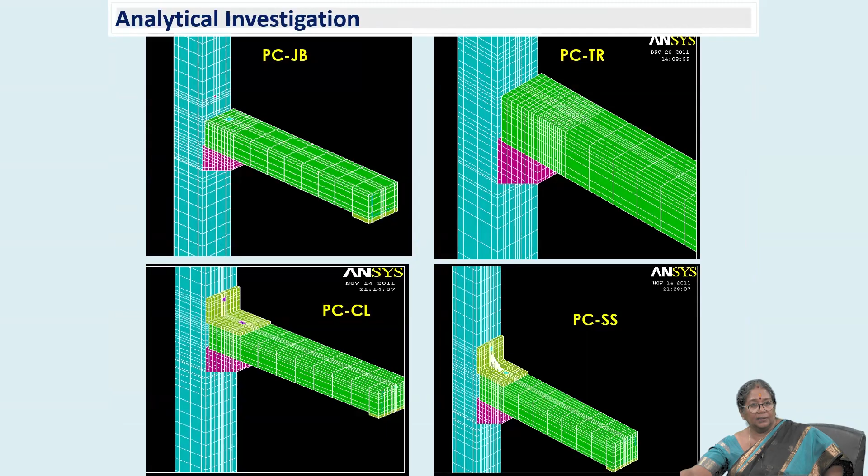I'm not taking much time. She modeled this in ANSYS and cross-verified it with the experimental results. These are the observations. This type of connection with the cleat angle with stiffeners, two stiffeners with energy dissipators on both sides, gave the most efficient result covering strength, ductility, and energy dissipation.

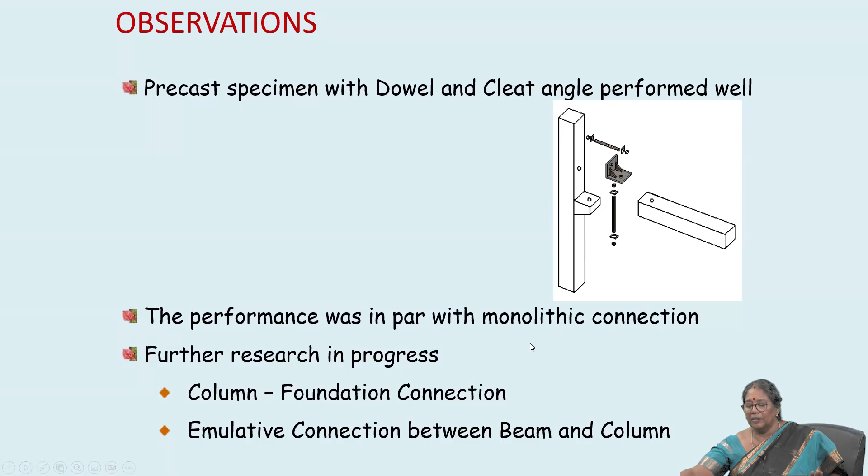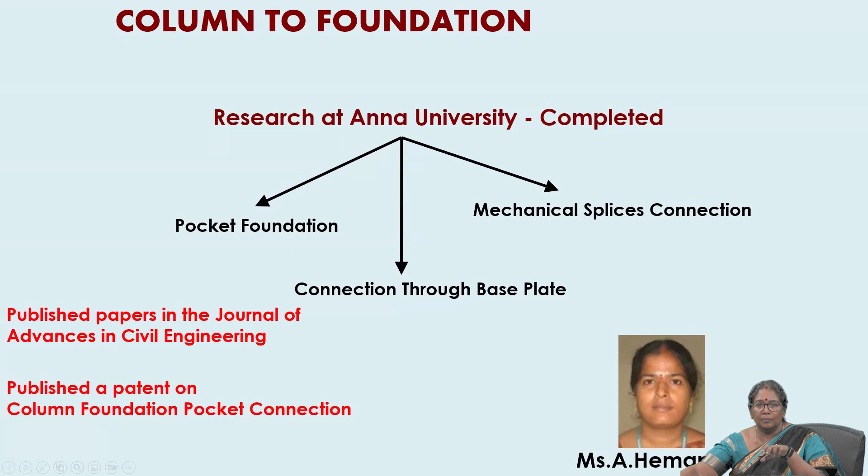Dr. Hemamati worked on beam-to-column-to-foundation connections, trying multiple connections with pocket connections and different types of detailing for the pocket. We got papers published in various journals including ACI journal, and she also got a patent on her beam-column-to-foundation connection, especially for the pocket connection.

This is the wall-slab connection. Dr. Arati completed her work long back and published around 4 international journal papers. I suggested all my research scholars compile their papers together and publish one book, so I led it like that. She also got a patent. Almost all students who complete their research, I suggest they file a patent.

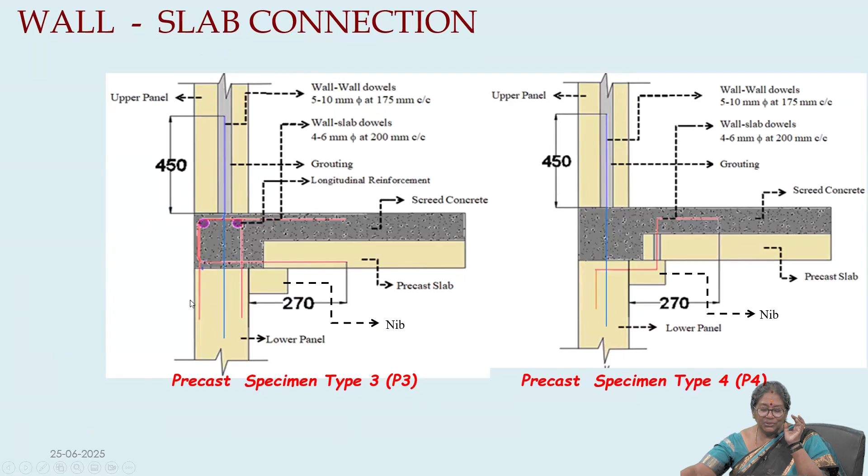Her work on wall-to-slab connection tried different types of connection. You can see here this one dowel, and this U connection, U double, two U's, one from here to here and here to here. Similarly she did this also. This is what someone asked about, the role of this dowel, along with the dry pack. All these specimens behaved well, and especially this type 3 connection performed extremely well with the joints.

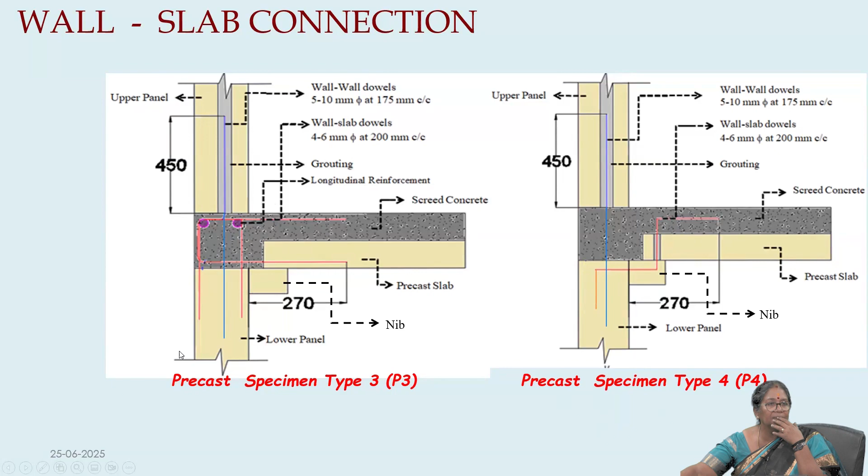And for promoting the precast industry, 5 research scholars completed their work, especially from Anna University. I'm telling you, 5 of them have completed, and one is now pursuing grout development.

I authored 2 chapters, one along with my professor Meher Prasad, and self and scholars contributed 1 chapter to the connection of the IS code, and seminars on precast construction were held during '14 to '18.

Later we missed that part, am I correct Pillai? We started it yearly once, and I delivered lectures in UK, Leeds University, ICI multiple lectures, CBRI Roorkee, E-Structures Pune, and many colleges in Tamil Nadu and Kerala. And this is our product.

Amalan sir will also support me on this. It is very much available with ICI headquarters, and it covers these contents.

Yeah, okay. I'll tell Radhakrishnan. Yeah, okay.

So this is our contribution. Amalan, Pillai, everyone has contributed towards the development of this. As Dr. Amalan told, it was initiated by Dr. Ramakrishna. It was a painful thing for us, but we made it happen with his blessings as well as Pradeep's. Finally we completed it around 2015.